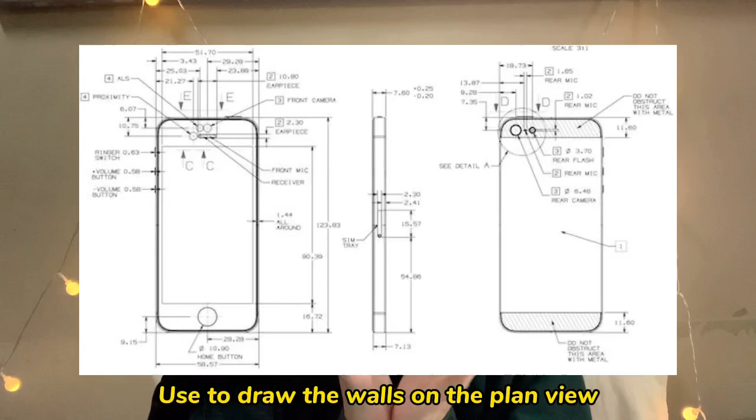Next, we have the bold lines. The bold lines are drawn with a soft B to a 2B pencil lead in a 0.5 to 0.7 millimeter mechanical pencil. They are used a lot for primary objects in a drawing. Bold lines have very dark and thick width, used to draw the walls on the plan view and also the outline around the perimeter of the elevation.

Third, we have the medium lines, which are drawn with an HB pencil lead in a 0.5 mechanical pencil. Frequently used in elevation and also 3D views, usually used for drawing information inside of the object drawn. Okay, next, fourth, we have the light lines. Light lines, which are used for potential movements.

The lines use an H to 2H pencil lead in a 0.3 or 0.5mm mechanical pencil. They convey information about the dimension lines, center lines, leader lines, section lines, and so on. It is very important to have these lines visible to know their movements.

Lastly, we have the border lines. The border lines are about a 2B to 4B pencil lead in a 0.7mm or 0.9mm pencil. It is used for a margin on the drawing sheet and to create lines around the title block. It should be dark and about twice the thickness of the bold line we talked about. Keep in mind that softer lead like B, 2B, 4B, etc. is easier to smudge once drawn, so it is advised to draw these lines last on our drafted documents.

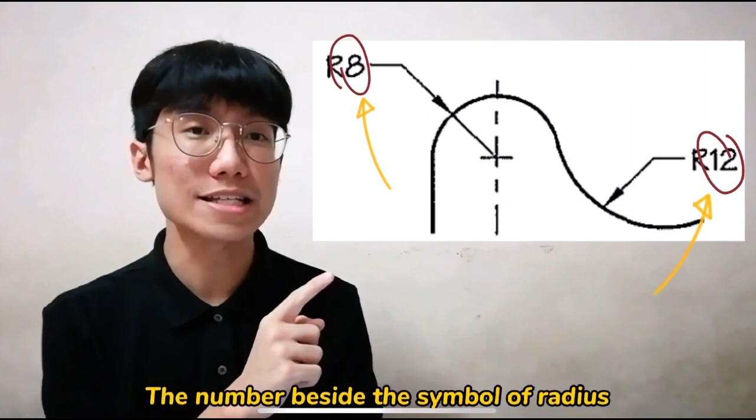Now let's see what they are. First, the symbol for radius R, which is used to indicate the length of the radius of a circle or arc part of the object, like this. The number beside the radius symbol is actually the length in millimeters. Similar is the symbol for diameter, which is a circle with a line crossed over it, and square. They are also used to represent the length of certain shapes.

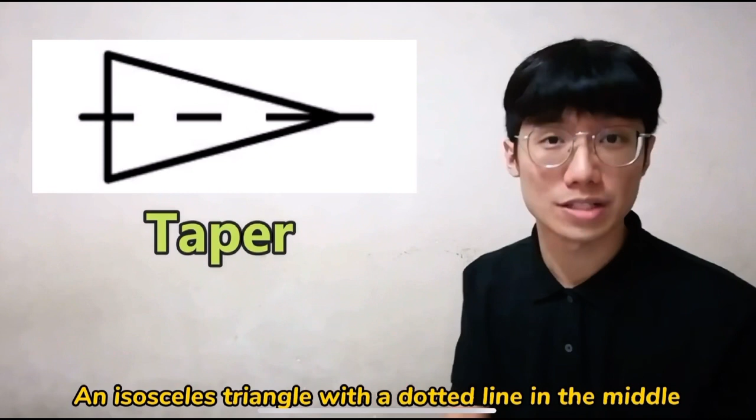Next, taper, an isosceles triangle with a dotted line in the middle, and slope, which shows a right angle triangle. For taper, the specification next to its symbol indicates the amount of change in diameter over a unit of length in an axis, while for slope, it indicates the amount of change per unit length.

Following that, datum, a small black or white triangle, which is used to indicate important parts of an object, such as a plane, a straight line, or a point, which is a reference in defining the geometry of the object. Lastly, the symbol for projection shows two drawings of a solid cone with a point cut off. They are used to remark whether the technical drawing is in first angle projection or third angle projection. This is their symbol. That's all from me. Thank you.